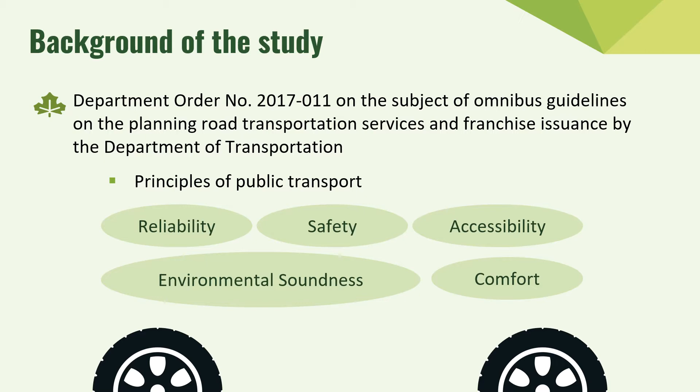These 5 principles were also considered by the researchers as measurement indicators. To strengthen the study's foundation, literatures relevant to the topic were used. More related literatures can be found on the manuscript.

The study of Wang and Zacharias on the perception of passengers on the physical environment of the vehicle will be used by the researchers to consider these factors during the vehicle assessment. With a broad definition of comfort, another related study by Imre and Celebi discusses factors to measure ride comfort, which pertains to relevant facilities and ergonomics.

A study by De Vecchi discussed the utilization of design tools like QFD to translate design requirements based on the needs of the passenger resulted from the satisfaction survey, translating it into an actual specification of the public transportation.

A local literature by Cause assessed the driver's workspace of the jeepney and determined the factors to consider in vehicle assessment, which includes the dimension of vehicle components and the area of the occupant.

Here are the 4 objectives of the study. First, to determine the passengers' and drivers' perception of the existing electric jeepney to measure their level of satisfaction.

Second, to evaluate the current specifications of the e-jeepney based on the principles of public transport, such as reliability, safety, accessibility, environmental soundness, and comfort, and check whether they comply or are within standards.

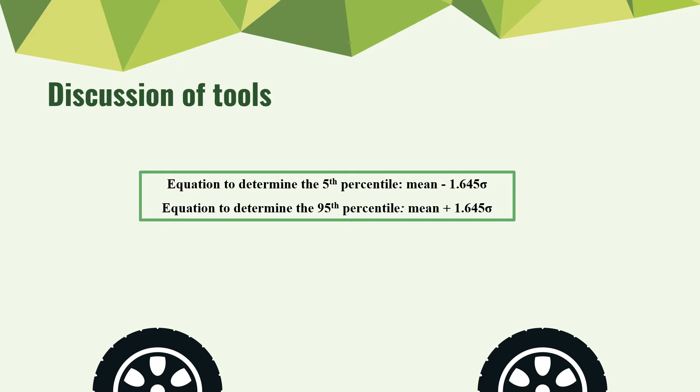To utilize the multiple linear regression, the researchers used the determinants of the criteria as the independent variables, and the overall rating of respondents in terms of the 5 criteria as the dependent variable.

An interview with a focus group consisting of 14 people who have used the E-jeepney was conducted in order to gather their needs and preferences when it comes to service and design aspects of an E-jeepney. The quality function deployment was used to determine the prioritized specifications subjected for improvements.

In cost-benefit analysis, the researchers enumerated the benefit associated with satisfaction to be experienced by the future users of the proposed E-jeepney's relevant specifications. The failure mode and effects analysis was applied to review and determine the possible failures that might have existed on the improvements that were recommended.

The researchers also created a failure mode and effects analysis scale for severity, occurrence, and detection ratings. In terms of severity, the scores were based on the impact of the effect caused by the mode of failure on the quality of comfort experienced by the users of E-jeepney.

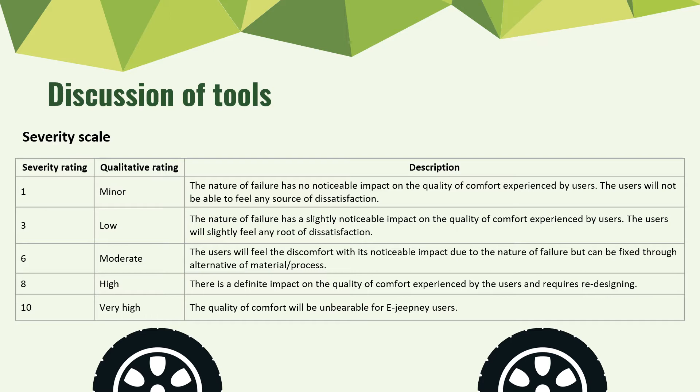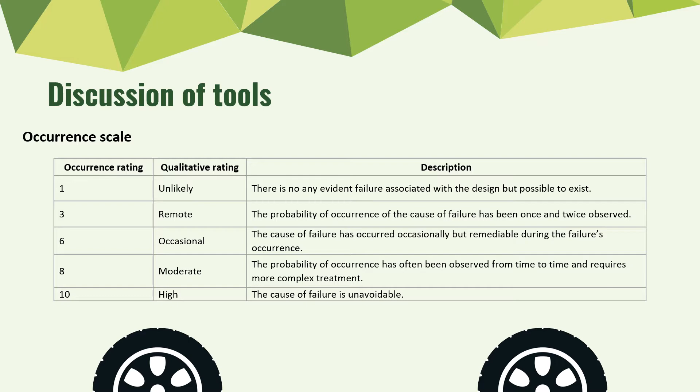For the occurrence scale, the occurrence scores were based on the probability that the cause would occur. Lastly, the detection scores were based on the ability of the current control to detect either the failure effect or mode of failure. The scores resulted from the mentioned 3 criteria were used for the computation of the risk priority number, or RPN.

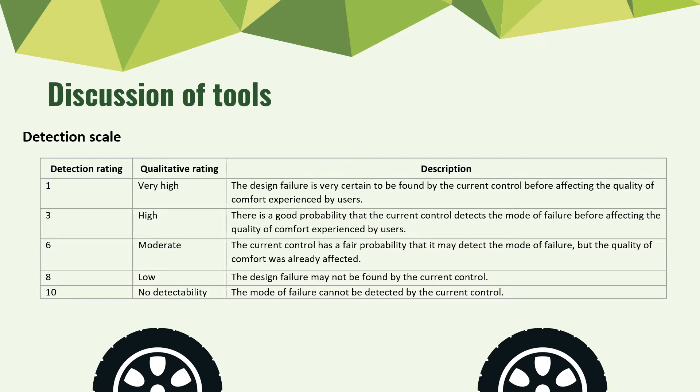We will now be discussing the results and discussion.

The lowest determinant was waiting time at the station with a mean rating of 2.88, which passengers were neither dissatisfied nor satisfied as perceived. Using the Tukey's test, the highest and the lowest reliability determinants were confirmed, since the determinants were significant to each other with a p-value of 0.

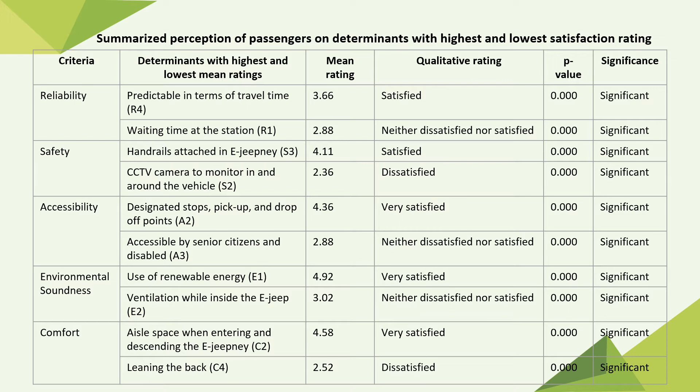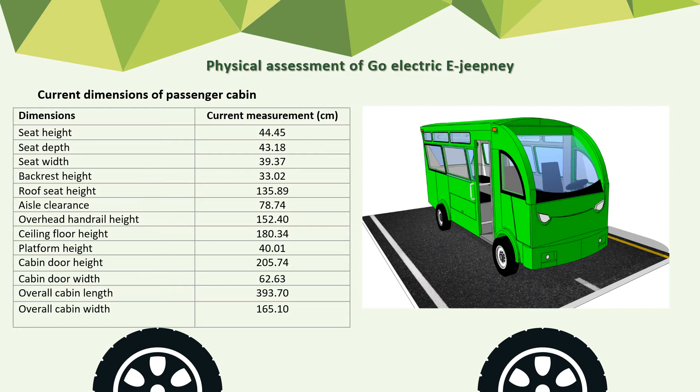The tabulated data shows the current dimensions of the E-jeepney's passenger cabin that were measured during the physical assessment at the terminal. More views of the E-jeepney were shown in the manuscript.

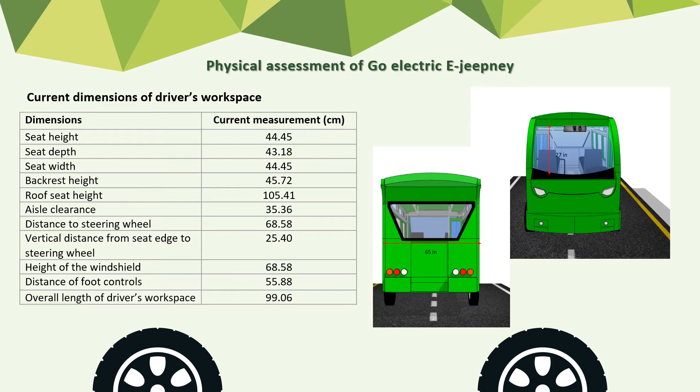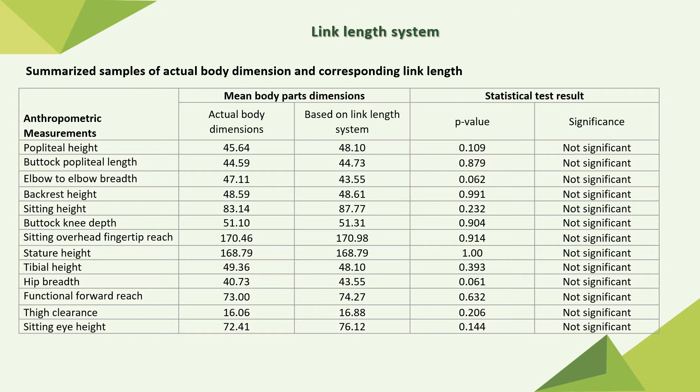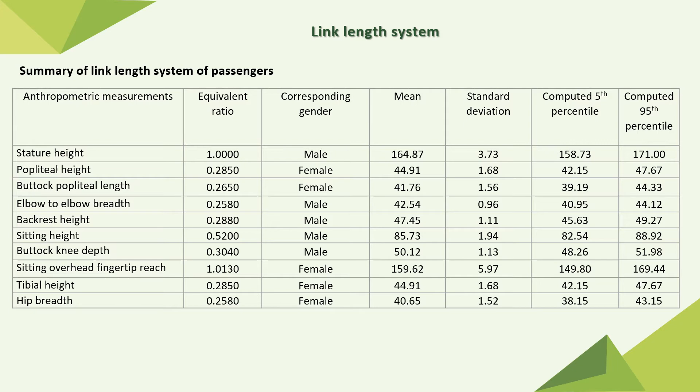The table shows the summary of link length system of passengers. It also contains the computed 5th and 95th percentile dimensions that were considered as standard dimensions to be accommodated by the passenger cabin.

The computed 5th and 95th percentiles of the drivers were also based on the formula applied, and the resulted values were considered as standard dimensions to be accommodated by the design parts of the driver's workspace.

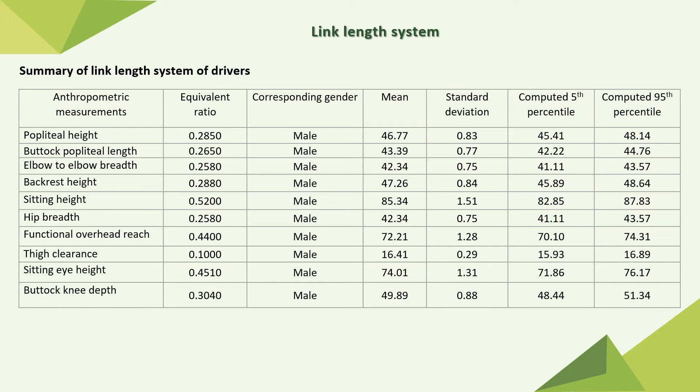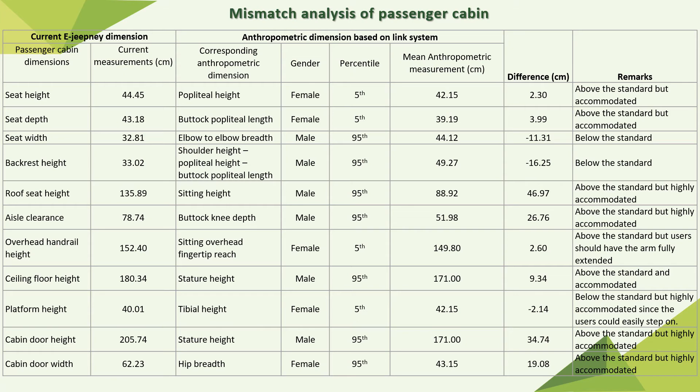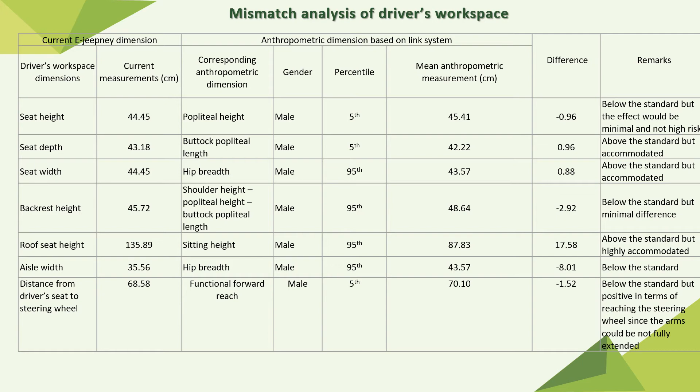The table presents the mismatch analysis between the current dimension of passenger cabin and standard mean anthropometric measurement computed from the link system. The seat width, backrest height, and overhead grab rail height were the existing dimensions that were not accommodated.

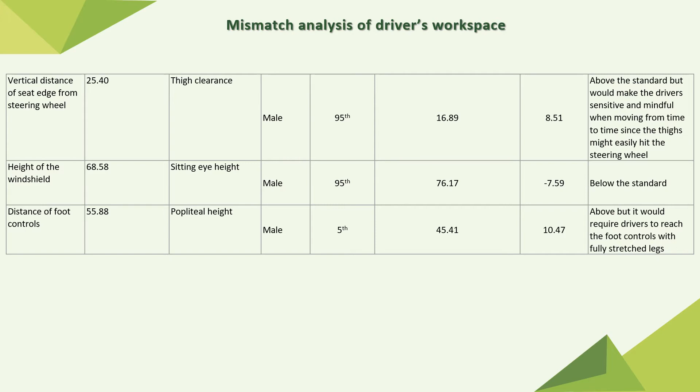For the reliability criteria, the determinants with the highest and lowest mean ratings were waiting time and availability of e-jeepneys on surrounding areas. The qualitative assessment for the waiting time.

Normally, the range of waiting time at the terminal based on the interview with the passengers was 15 to 30 minutes before boarding. In the driver's point of view, their waiting time to load completely before the pandemic was in the range between 5 to 10 minutes.

For availability of e-jeepney on surrounding areas, these were the number of e-jeepneys per route. For PITX to Alabang, 4 e-jeepneys; PITX to West Bicutan, 4; PITX to East Bicutan, also for PITX to Sukat, 3; and from PITX to Nichols, it's also 3.

For the safety criteria, the determinants with the highest and lowest mean ratings were dashboard camera when driving, removal of cash usage for payment, handrails attached in e-jeepney, and CCTV camera to monitor in and around the vehicle.

So for the qualitative assessment of each of the determinants: dashboard camera when driving - there was a dashcam installed inside the e-jeepney but not always working.

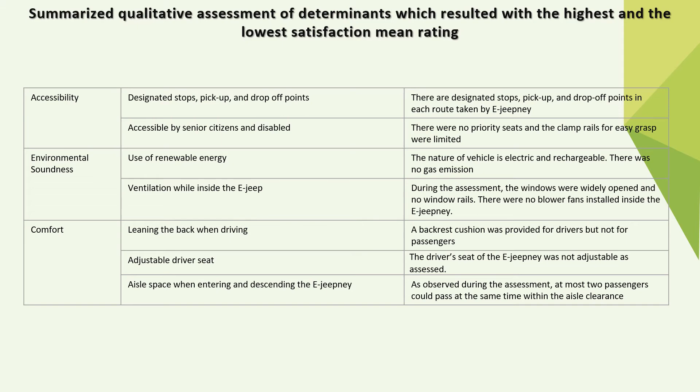And lastly, the aisle space when entering or descending the e-jeepney, as observed during the assessment, at most two passengers could pass at the same time within the aisle clearance. The table shows the summarized determinants with the highest and lowest coefficients using regression analysis based on passengers' perception.

In terms of reliability, the schedule of available e-jeepneys operating is the highest contributor to the overall rating model, while waiting time at the station was the lowest. The negative coefficient implies that the ratings of passengers on the waiting time determinant is decreasing.

In terms of safety, the CCTV camera to monitor in and around the vehicle is the highest contributor to the overall rating model, while the handrails attached on the e-jeepney was the lowest. The determinant of handrails attached on the e-jeepney has a negative coefficient, which means that the ratings of the passengers are decreasing.

In terms of accessibility, the highest contributor to the overall rating model is the point-to-point route destination, while the lowest is accessible by senior citizens and disabled.

While for environmental soundness, the highest contributor to the overall rating model was the level of lighting, while the lowest is the sound level. Lastly, in terms of comfort, the highest contributor to the overall rating model was the leg comfort, while the lowest is leaning the back when riding the e-jeepney.

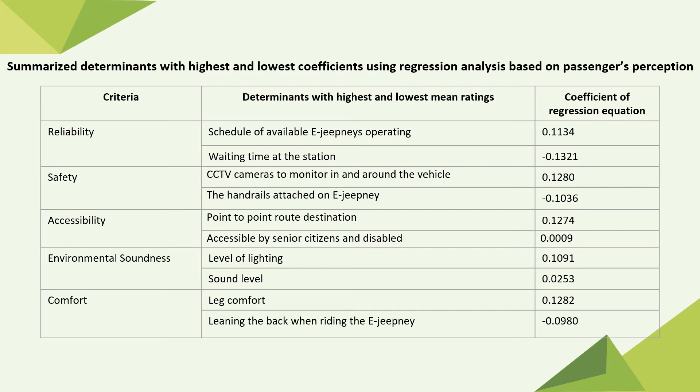The table presented shows the summarized determinants with the highest and lowest coefficients using regression analysis based on driver's perception.

In terms of reliability, the determinant with the highest contribution to the overall rating model was predictability in terms of travel time, while the lowest was reduced waiting time at the station with a negative coefficient, meaning the driver's ratings were decreasing.

In terms of safety, the highest determinant was removal of cash usage for payment, while the lowest was GPS installed to enable recording of vehicle location, with a negative coefficient meaning driver's ratings on the GPS installed were decreasing.

On the other hand, in terms of accessibility, designated stops, pick up, and drop off points resulted in the highest contributor in the overall rating model, while the point-to-point route destination resulted in the lowest contribution.

In terms of environmental soundness, ventilation while inside the e-jeepney during travel time was the highest contributor to the overall rating model, while the use of renewable energy with lower air pollutants resulted in the least contribution, with a negative coefficient meaning driver's ratings on this determinant were decreasing.

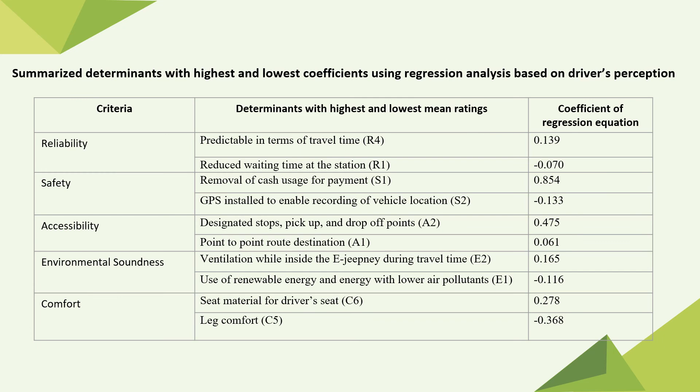The table shows the strengths and weaknesses of the E-jeepney based on the 5 principles of public transport. This was also the basis for the overall improvement of the E-jeepney by addressing the weaknesses.

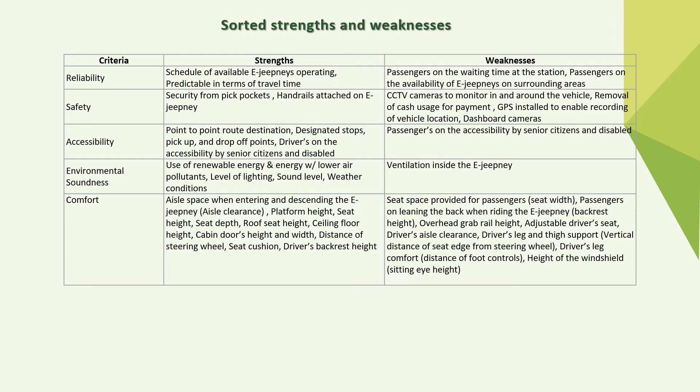Attributes associated with comfort resulted in having the highest importance ratings, which includes the size of passenger seating room, height of backrest, adjustable driver's seat, distance of steering wheel, distance of foot controls, vertical distance of the steering wheel, driver's aisle clearance, overhead grab rail height, and height of the windshield.

The lowest ratings resulted on the attributes associated with safety. An importance rating of 110 implied the attribute to be most prioritized.

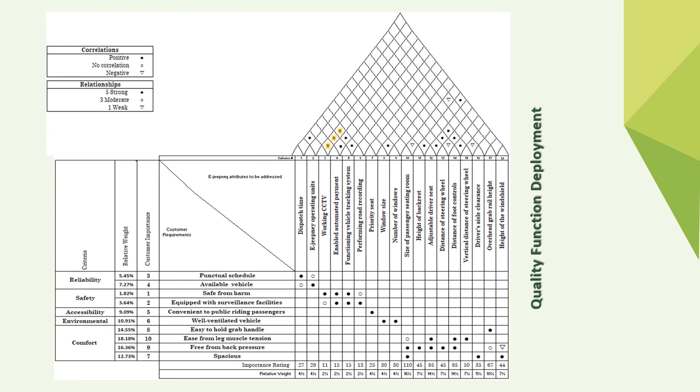The table shows improved specifications of passenger cabin dimensions. The improved specifications use the standard mean data resulted from the linked length system. Refer to the manuscript for the proposed design of the passenger cabin, shown in figures 11 to 13.

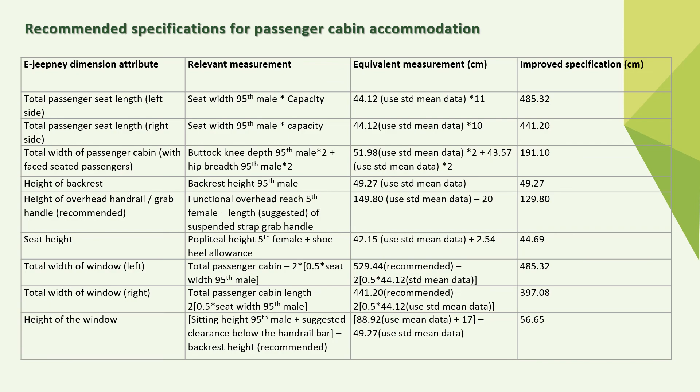The table shows improved specifications of dimensions for the driver's workspace. The recommended specifications use the standard mean data resulted from the linked length system. Refer to the manuscript for the proposed design of the driver's area, shown in figures 15 to 19.

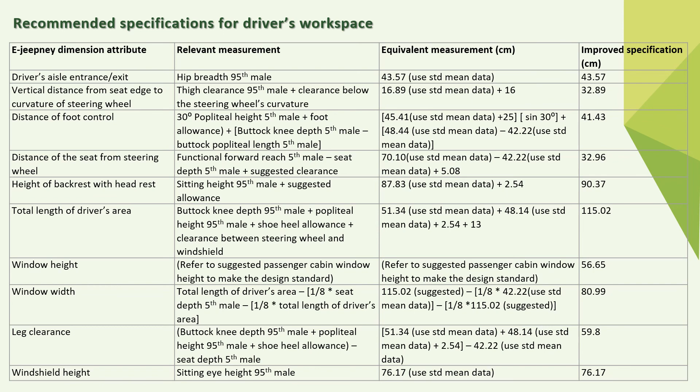As shown in the cost-benefit analysis, the total cost for the proposed design of E-jeepney, including the electric vehicle and customization, is 2,090,500 pesos, whereas the total cost for customization was added to the current E-jeepney's cost. It resulted in an 11% increase in the E-jeepney's price, but the recommended specifications would contribute to an increase in the user's level of satisfaction when riding and driving the E-jeepney.

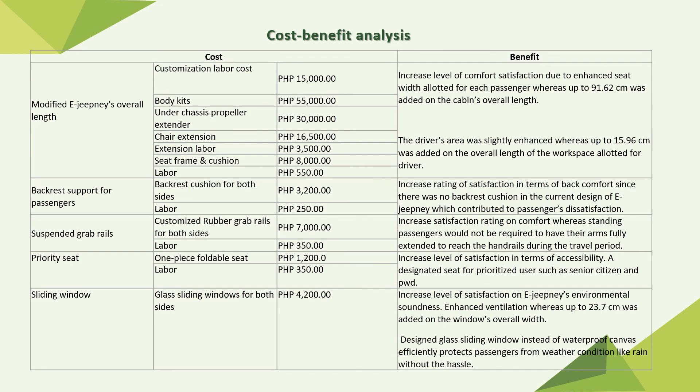As shown in the cost-benefit analysis, the total cost for the proposed design of E-jeepney, including the electric vehicle and customization, is 2,090,500 pesos, whereas the total cost for customization was added to the current E-jeepney's cost. It resulted in an 11% increase in the E-jeepney's price, but the recommended specifications would contribute to an increase in the user's level of satisfaction when riding and driving the E-jeepney.

Design input which conceives a rating of 6 or 10 on severity, occurrence, and detection based on failure mode and effects analysis includes: designed standard length of cabin seating room to make passengers sit comfortably, added backrest cushion, suspended grab rail attached on handrail bar, adjustable driver seat, backrest with lumbar support, added headrest, working CCTV inside the E-jeepney, enabled automatic fare collection system, functioning dashboard camera with GPS, and detachable mechanical ramp.

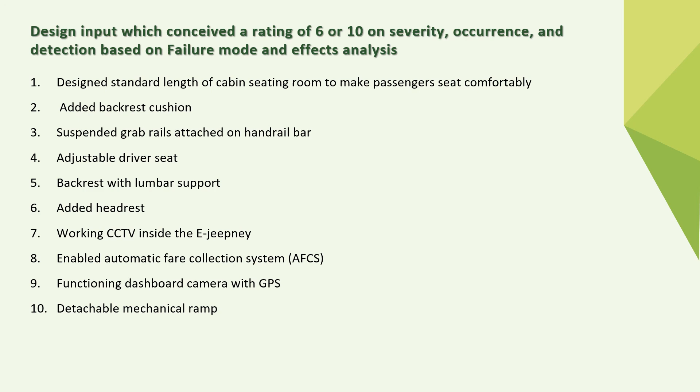For the conclusion of this study, passengers and drivers were neither dissatisfied nor satisfied on the comfort experience with the current design of E-jeepney, resulting in continuous low satisfaction ratings from both respondents.

Among the measurement indicators, the safety criterion was rated by passengers with the highest satisfaction rating and was perceived as satisfied, while it was service reliability for drivers. Most of the dimensions of the passenger cabin accommodated the corresponding population for each cabin part of the E-jeepney. The driver's workspace obtained more unaccommodated standard dimensions, which can be concluded that the driver's scope required more improvements.

It can be concluded that the determinants used under each criterion are essential in the overall satisfaction rating of each jeepney's user, since the behavior of the ratings given by the respondents reflect on the overall rating model.

Most of the improvements on the e-jeepney were in terms of comfort, environmental soundness, and accessibility, whereas the anthropometric principle was considered, while other design input required compliance with operating equipment installed in the e-jeepney to address reliability and safety.